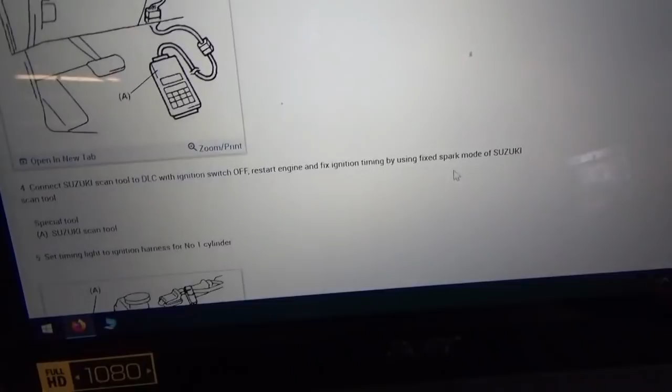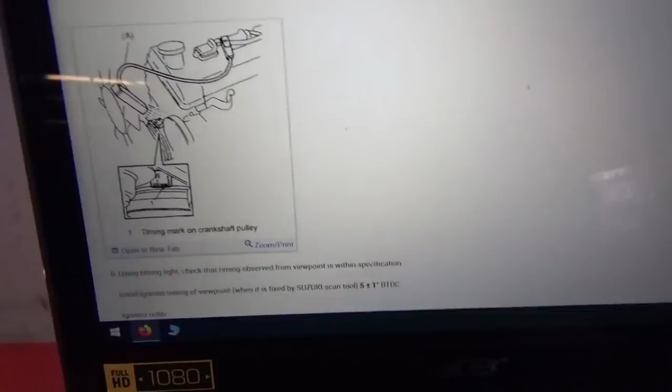So if we look up the procedure, this is an OEM procedure. Warm up the engine, hook up the scanner, and switch it to fixed spark mode. That will set the timing to 5 degrees before top dead center. Then using a timing light connected to the primary wires on the ignition coil number 1, you point it at the harmonic balancer, and we should see that little mark at 5 degrees before top dead center.

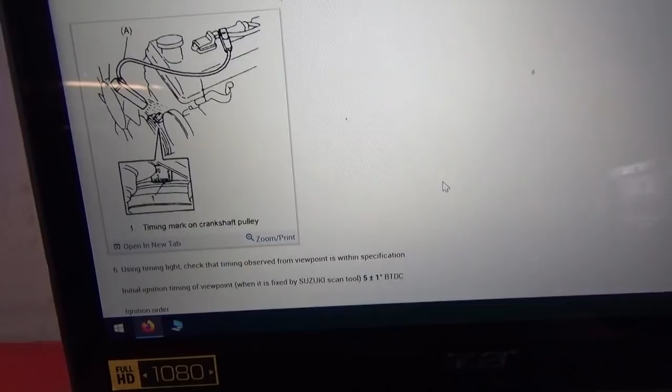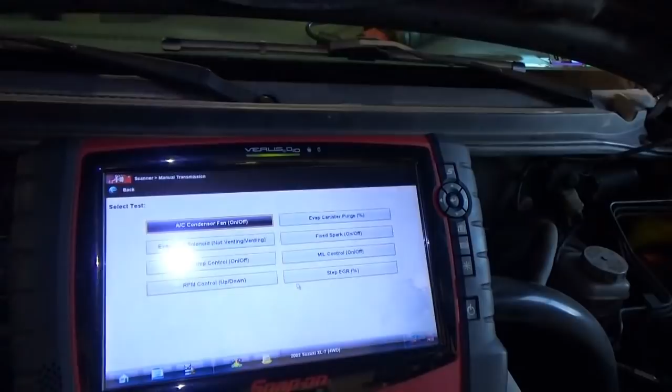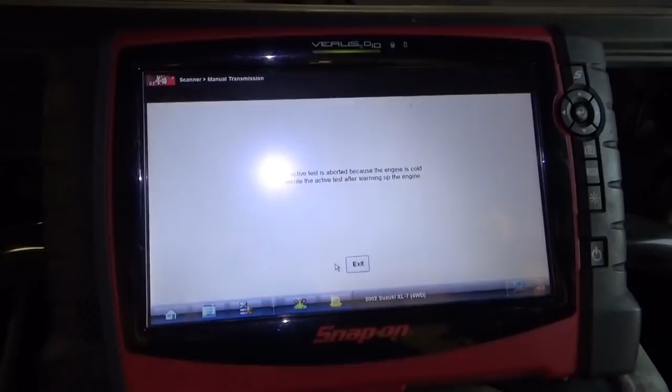So let's do that check and go from there. Alright, start it up. And on our scanner, from the actuator tests, we go to fixed spark. So warm up the engine, engine's idling. Okay, it cooled down a little bit, so it'll warm back up.

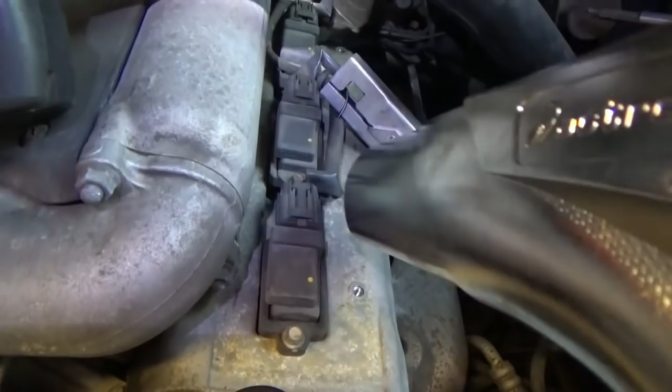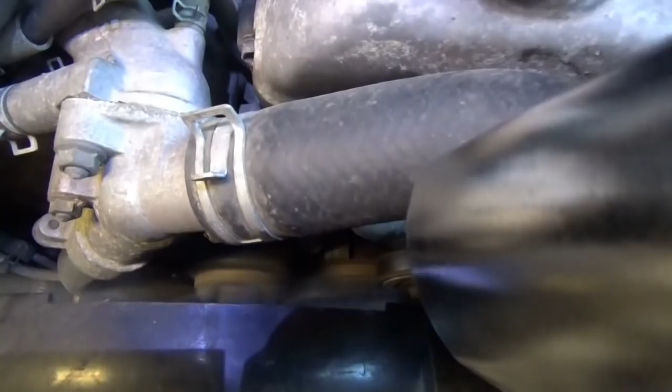The cool thing is, the timing light is connected to the primary wires, the 3-wire coil - feed, ground, and the low voltage trigger signal. The timing light works off of the current through the primary winding, so you don't need a secondary ignition lead to have your timing light work, which is pretty cool. So we can aim it down there, and you can see the white mark, hopefully. It's to the left of the marks on the timing cover.

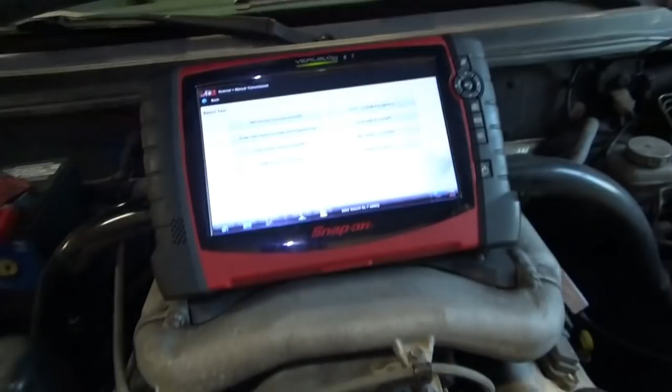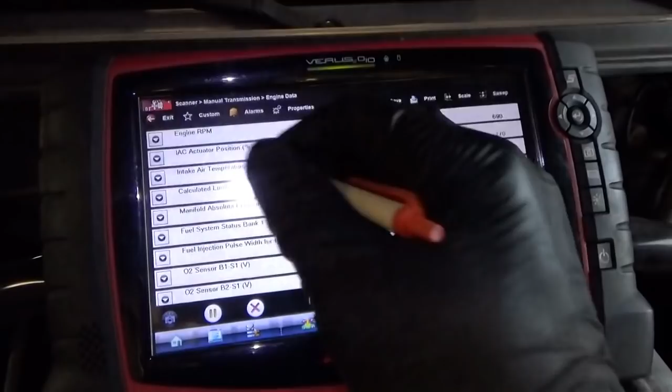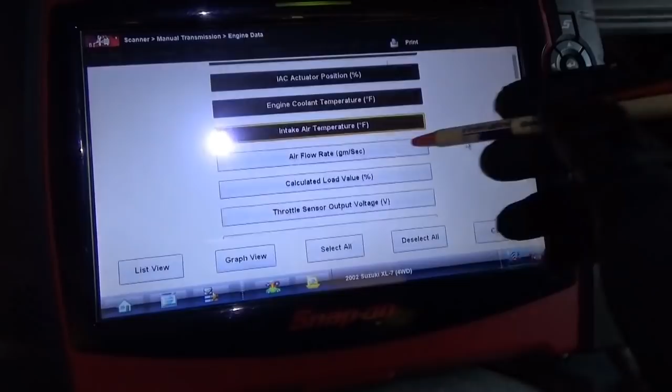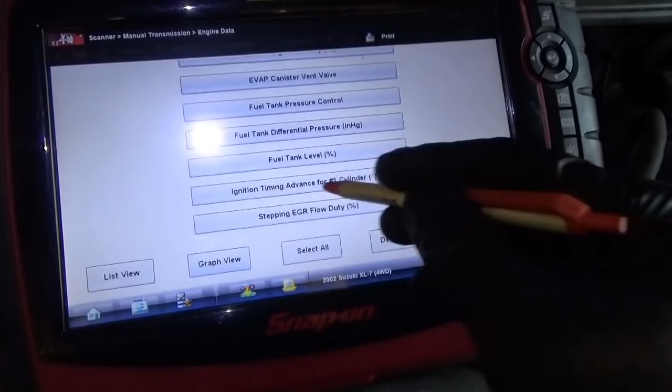So once this engine's warmed up, let's just do data display. And the fuel trims, I notice, are a little high - about 10% long term at idle. So if we go to custom data: RPM, desired RPM, IAC, engine coolant temp, and let's do long term on bank 1 and 2, and ignition timing advance for cylinder number 1.

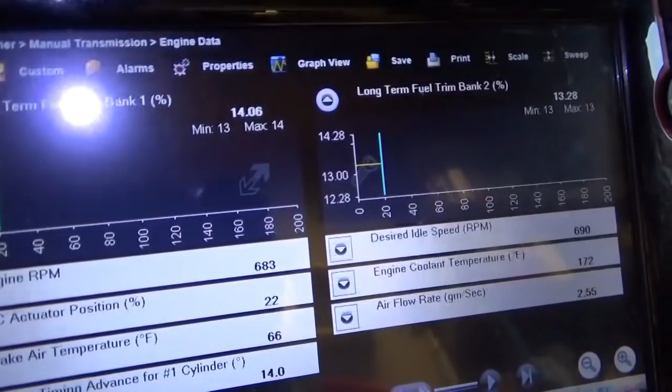So if you look at our fuel trims, right now they're at 13%, which is not good. It's supposed to be around 0. The mass airflow is about 2.5 grams per second. It's a 2.7 liter engine, so that's pretty close. Let's rev it up a little bit.

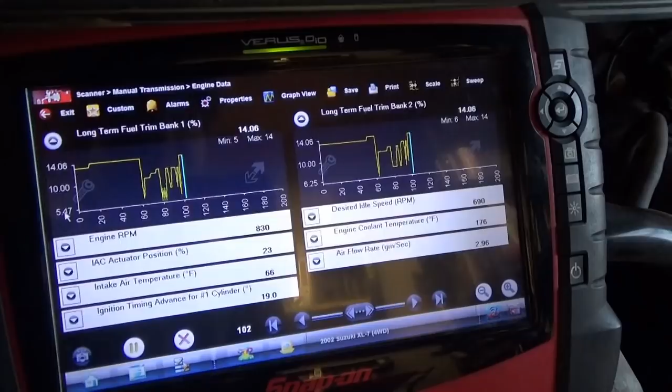See, the fuel trims are definitely kind of high. So another variable here is that we either want to confirm or not confirm is the timing chain. The timing chain tensioner is getting a little rattly again. If you remember, we replaced it at 130,000 miles, and it's been fine since then. Now at 170,000 miles, it's starting to rattle a little bit when the engine's hot, at a hot idle. So is it possible that this cam chain is stretched, causing everything to be retarded, and basically the engine's not breathing right, and you get fuel trim problems, power issues.

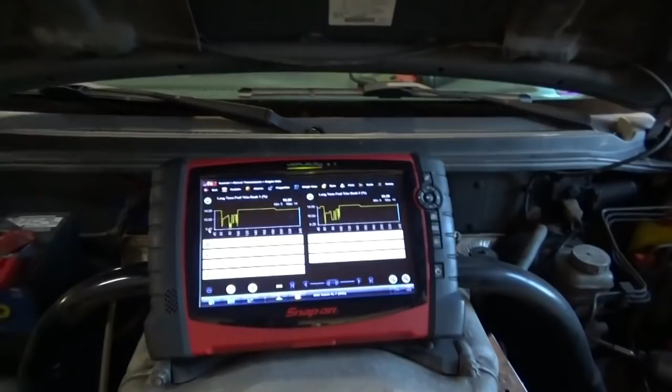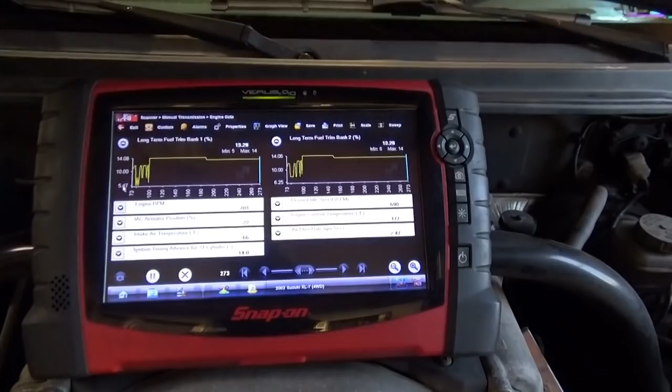The mass airflow is only 2.5 grams per second right now, maybe that's a little low. So let's jump back into that test - actuator test, fixed spark control. Again, custom list: RPM, airflow, long-term, and let's graph ignition time.

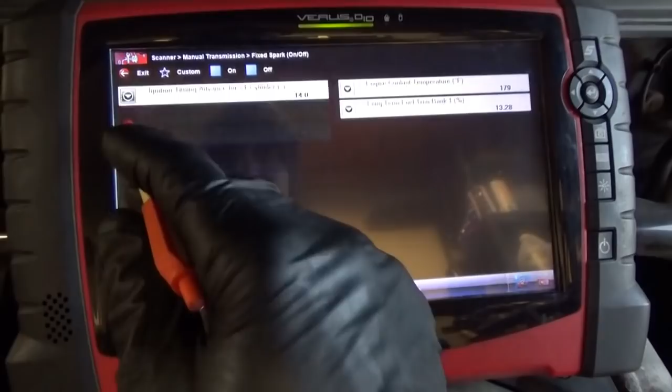So when I hit on, this thing goes to 5 degrees fixed timing, and if you look at our harmonic balancer, that white mark is still way to the left of the timing cover marks. It's at about 20 degrees before top dead center. It's fixed, but it's not at 5 - it's like 15 degrees out of spec.

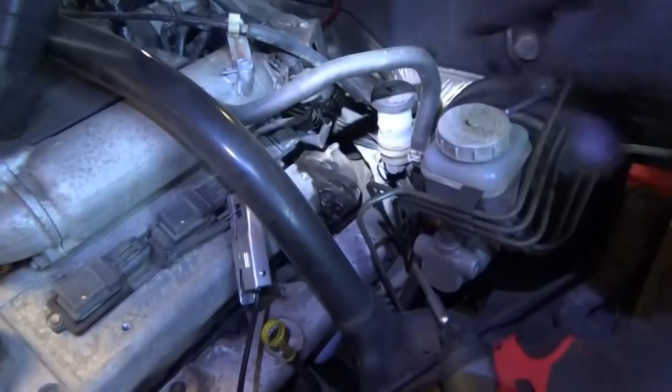Now, a few years ago, I actually advanced the camshaft position sensor just to get more power, and it worked, but something's still not right. So first thing I want to do is confirm that white mark is indeed TDC of number 1, so we're not chasing ghosts. Then we can use a pressure transducer in cylinder number 1 and do 2 channels, the spark and TDC number 1, and see how many degrees on the Pico that's occurring, to verify what we're seeing here. Then we can tweak the spark timing, see if it does anything, and make heads or tails out of this. Also on the pressure transducer waveform, we should be able to see if the valve timing is getting retarded, and by how many degrees.

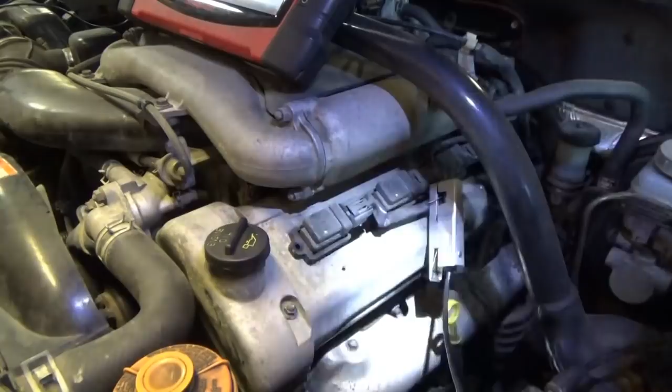We'll go from there. First, let's pop out this number 1 ignition coil and the spark plug.

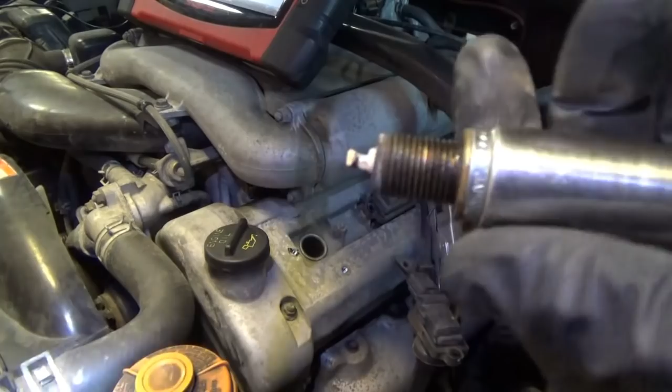Now the spark plugs here I have not touched since I bought this vehicle. It had 80,000 miles on it, now it has 170. These NGK iridiums show no wear, so I haven't replaced them, which is amazing. These might still be the original plugs.

So now that we have the spark plug out, I'm going to put a wrench on the harmonic balancer, turn it, and put a rod in the cylinder to make sure we're at TDC when that white mark aligns with the timing cover. I have a little piece of brake line placed in the spark plug hole, touching the actual piston. As I turn the harmonic balancer here, we'll see where TDC is. You can see it's rising out. Still coming up.

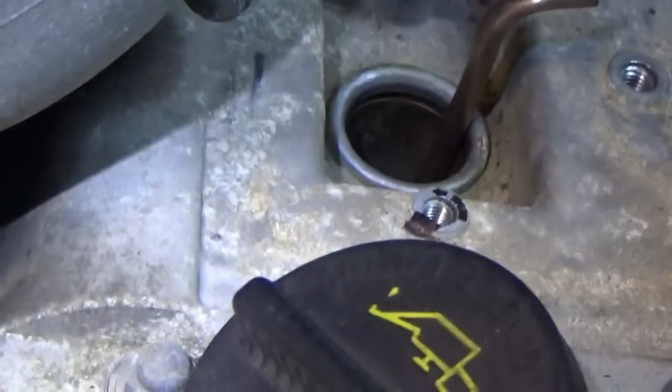Right about there. And indeed, the little white mark is exactly at 0 degrees right now. So right there is 0. We're definitely at TDC. As soon as I turn the wrench a little bit more, that rod will start to go down.

Okay, so I believe the white mark. So our ignition timing is definitely way over advanced.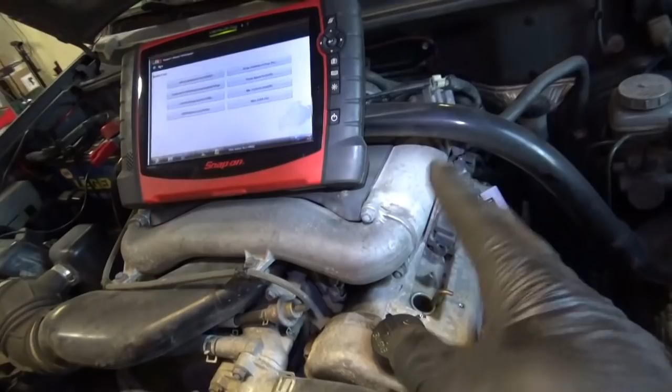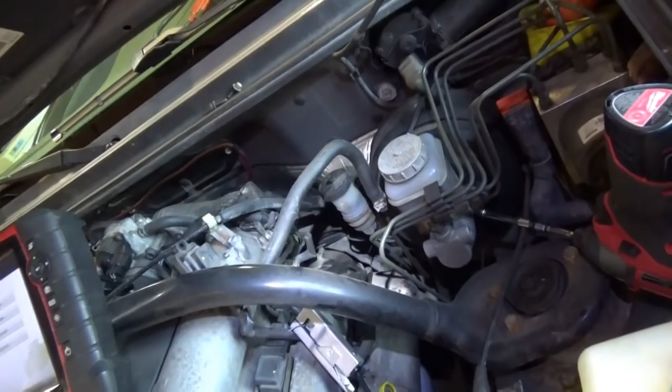Now I want to put an in-cylinder pressure transducer in here and unplug the fuel injector. Do the same test with 2 channels. We'll put a current clamp on here, and then we can tweak the camshaft position sensor and see, if we go by spec, 5 degrees before top dead center, what that does to our power and our fuel trims.

Alright, so here's the setup. 2 channels. Channel 1, the PHAD homemade pressure transducer, and our amp clamp on the 20 amp scale. 1 volt is 10 amps. Obviously we want to re-zero our amp clamp. There we go, it's 0. We're showing 0 psi. These are custom scales, so this goes from 0 to 130 psi.

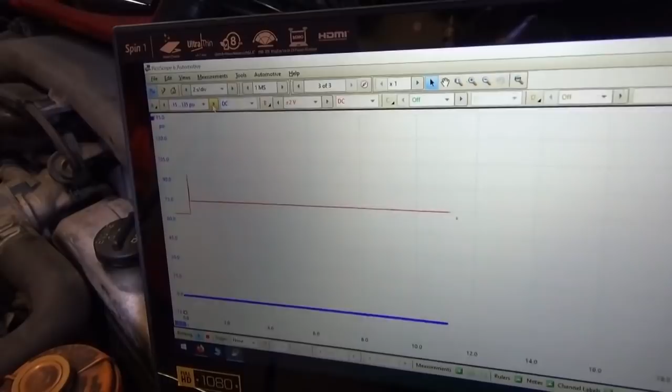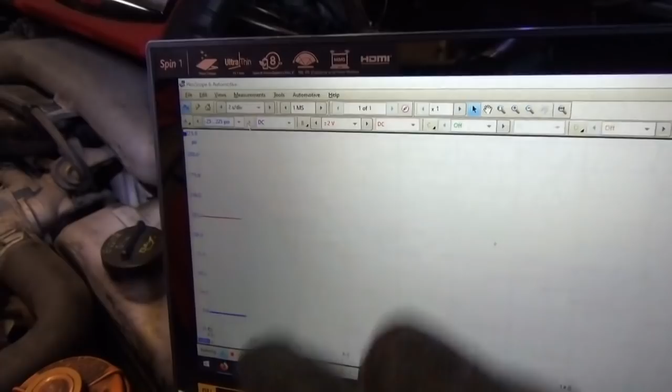We're just running it at idle. I made several custom scales here. You can go all the way down to -20 to 80, -15 to 135, and then -25 to 225. This transducer is a 200 psi unit. So let's try the middle scale.

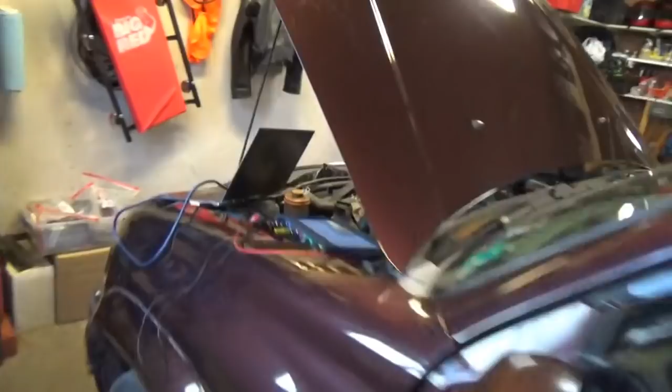Let's fire it up, see what happens. Make sure my laptop is steady. Okay. Obviously a misfire. You got the spark jumping right there.

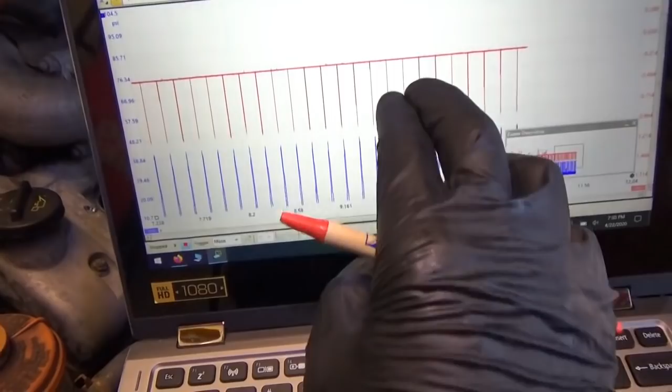Pause it, see what we have on our transducer. So our current is going the other way, so we can just flip the amp clamp around. I guess that's the power wire, not the ground, but it doesn't really matter.

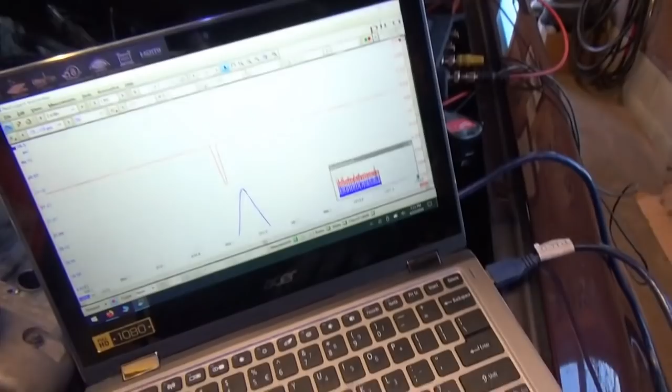Okay, go back to 100. Okay, now we're right side up. And what happened to our pressure transducer? Okay, there's our waveform. You do a snap throttle.

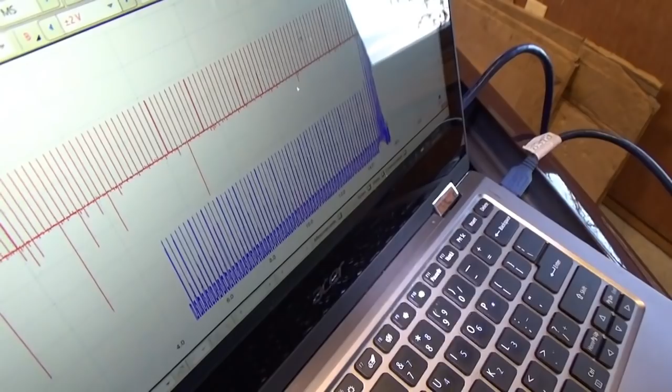Okay. Now, let's do the fixed spark.

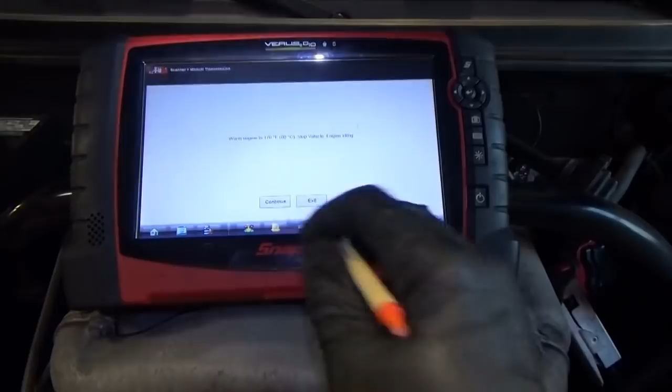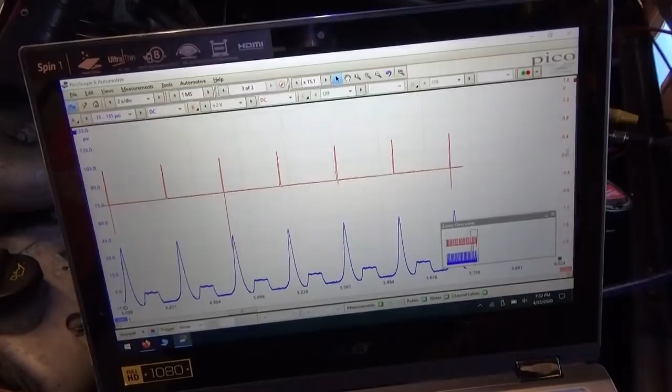Okay, we'll let the engine warm up a little bit more. For now, we can pause and zoom in. You can actually see where the spark is occurring right now.

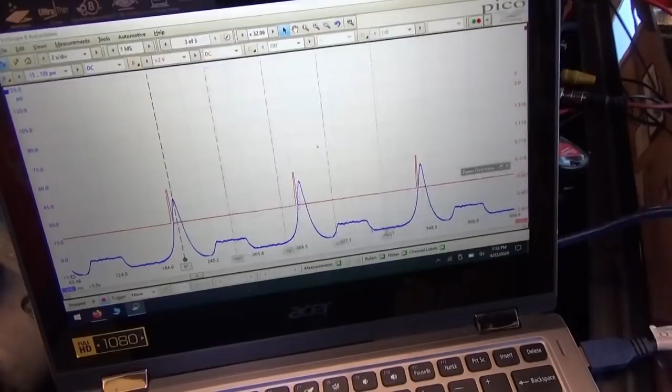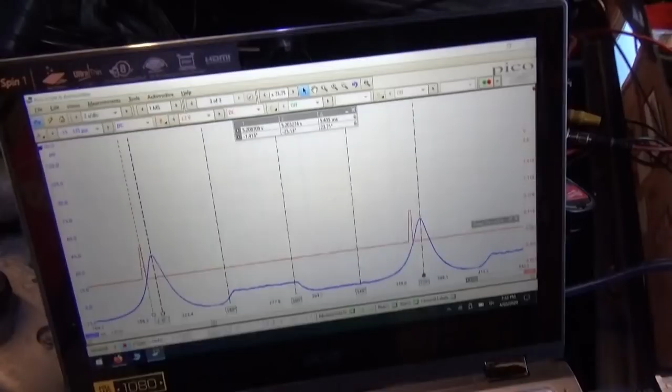Let's put in some cursors. So we go to rulers, 4, okay. So let's say that's 0 degrees. That's 720. Now, from there to there, delta is 23 degrees.

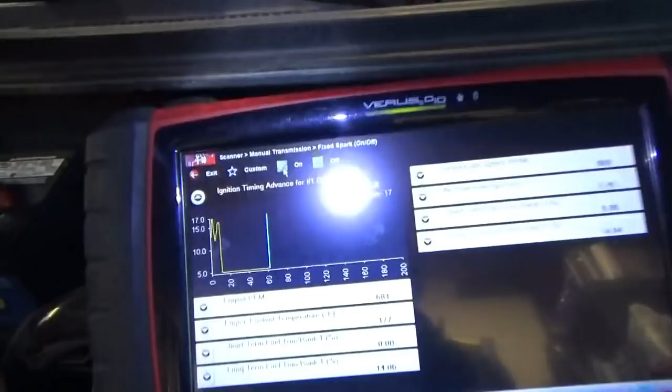Okay. Alright, engine's warmed up. I got it activated for 5 degrees before top dead center. Verify with the timing light. It looks like we're about 20 degrees before top dead center. And on the scope, I'm rolling.

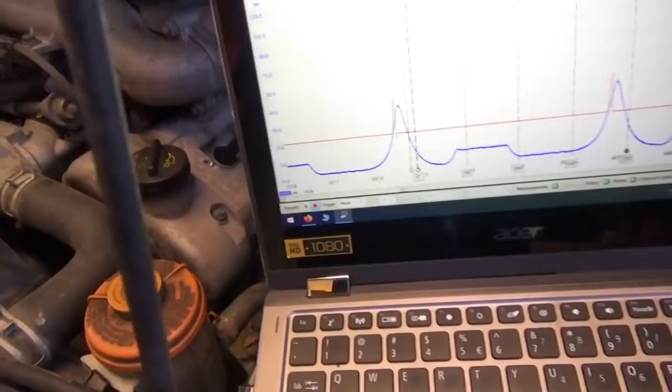So let's pause that. Zoom in. Make sure our cursors are right at TDC. Right. See there.

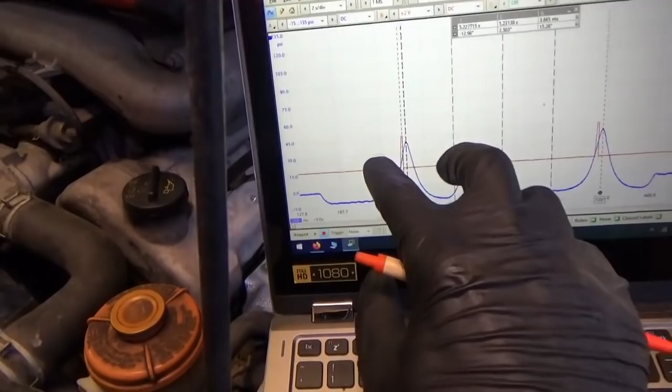So we're shooting about 14 degrees before top dead center. It should be 5. Yeah, I guess that's believable.

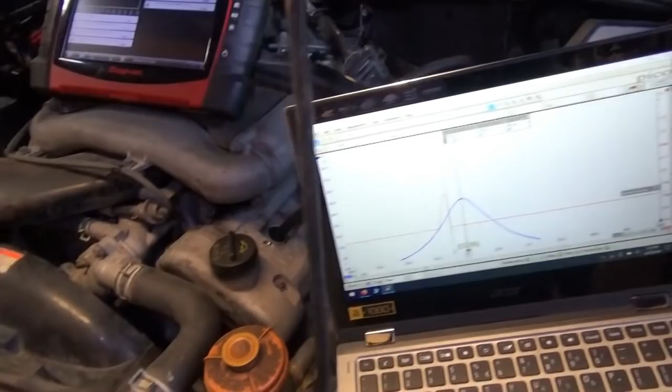So what if we right now move this cam sensor to make that white mark line up and do the check again. Alright, so I loosened up the pinch bolt for the cam sensor and I put a white line right where it is right now.

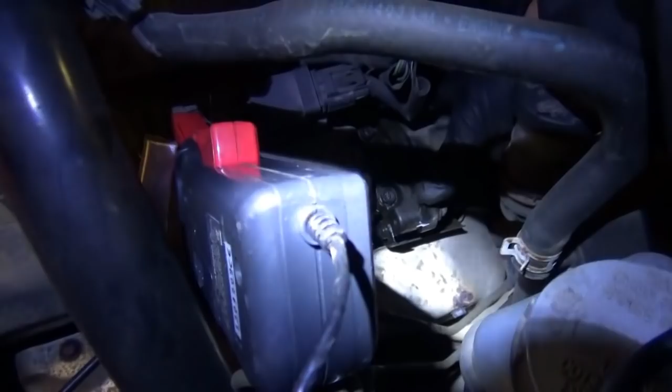Camshaft's turning this way. We want to retard it a little bit to get back into spec, like that way. Let's go back to our timing gun. We're still at 5 degrees.

So our mark is at about 15 degrees right now. We gotta keep going. So we're at about 10 degrees right now. Man.

One, two, three, four, five. Okay, right there. That's spec. So tighten the bolt down.

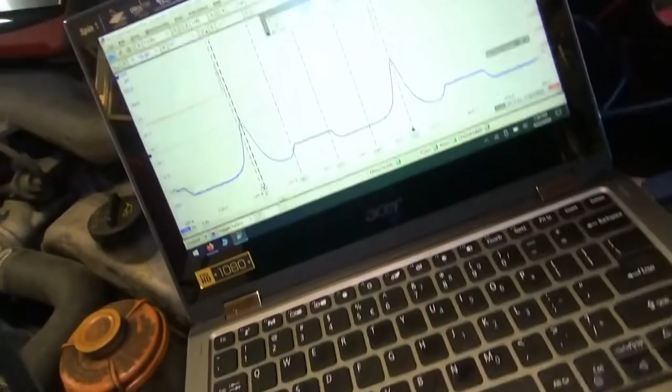You can see how far advanced I had it. And now, we run the scope. Pause it. Zoom in.

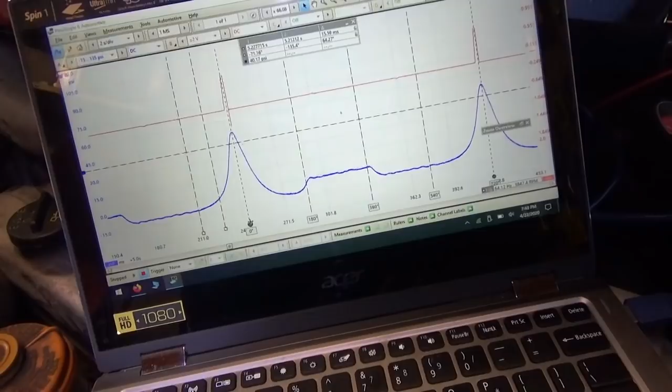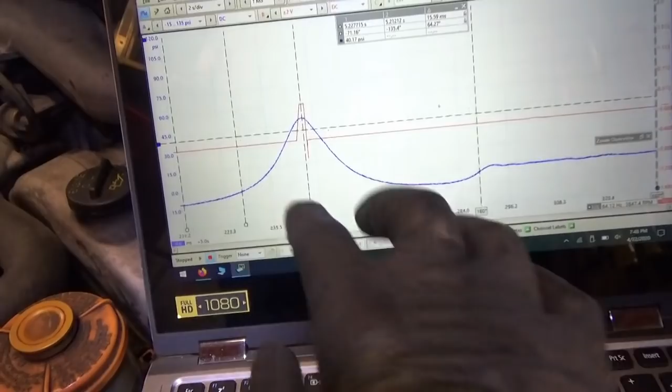You can actually see by the scope our ignition is actually occurring after top dead center now. So the timing gun might not be the most accurate way to do this. Let's set a trigger.

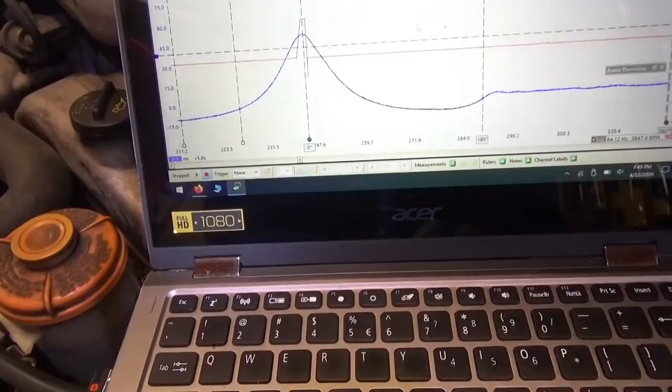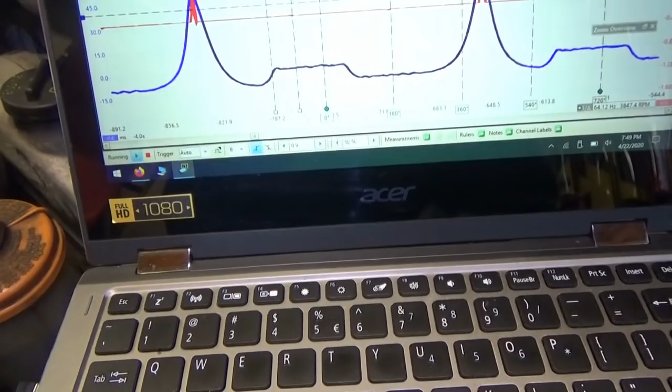A channel B. Where's our trigger? To 100%. And then knock down our seconds per division here.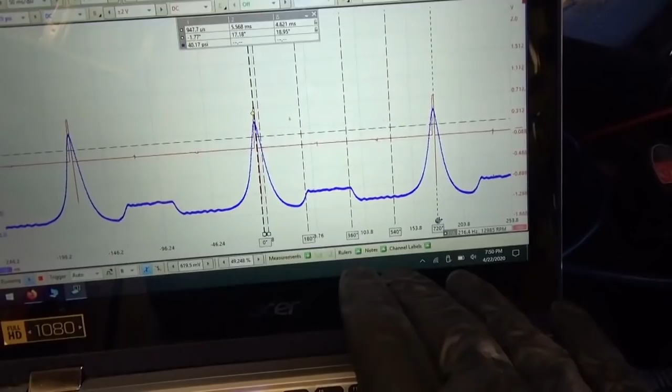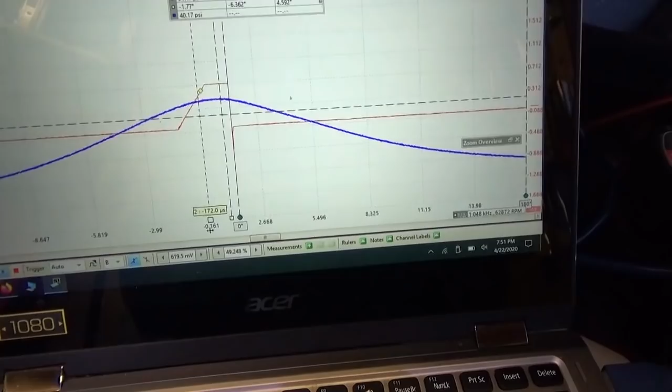Now, to zoom in, we want to be 5 degrees. We want the ignition to occur right there. Okay?

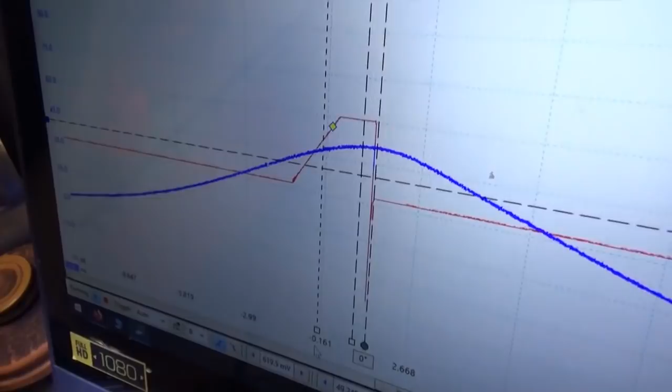Alright, so now I'm going to advance the timing. And look at that red trace. Okay, so the trigger we should have set to the falling edge. There we go. And now we're almost there. A little bit more.

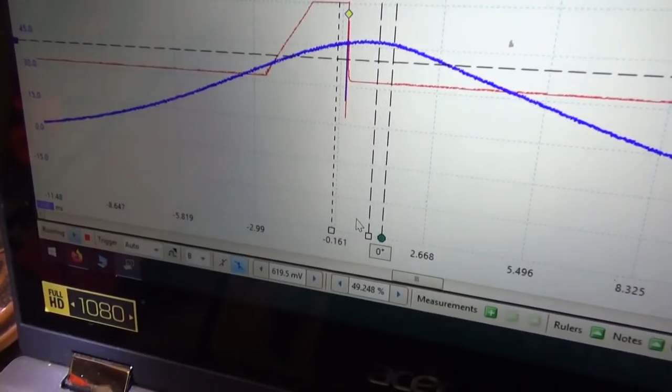About 5 degrees. And what does our timing gun show? About 12 degrees. So what's the discrepancy from? Is this not really TDC according to the pressure transducer?

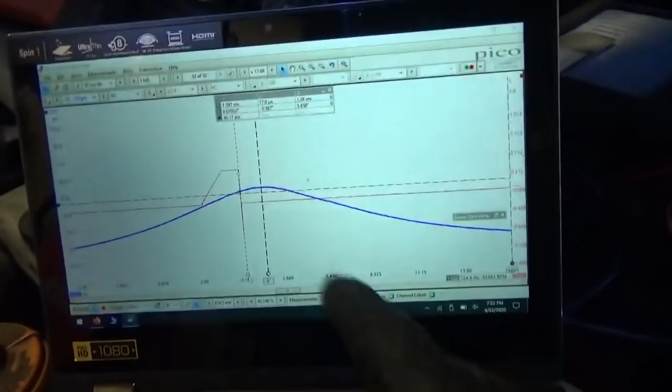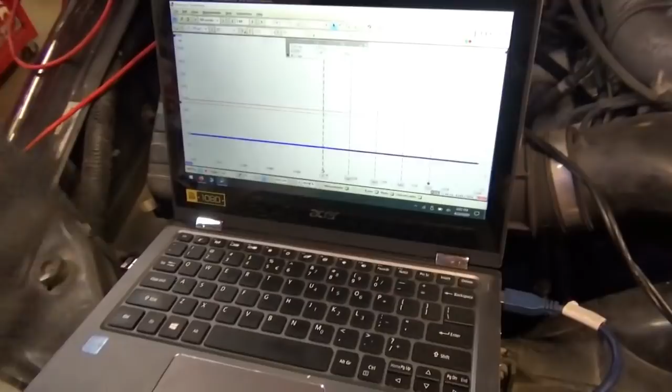Okay, so now we have the same experiment set up on cylinder number 2. And we could do the same fixed spark. Now start it up, put it into fixed spark mode, and see if this one is 5 degrees off, or if the timing chain is stretched and the ignition timing is off of this bank, and if the actual mechanical valve timing is off, well, what do we expect? TDC should still line up, but maybe the peak pressure will be a little different, but let's give it a try.

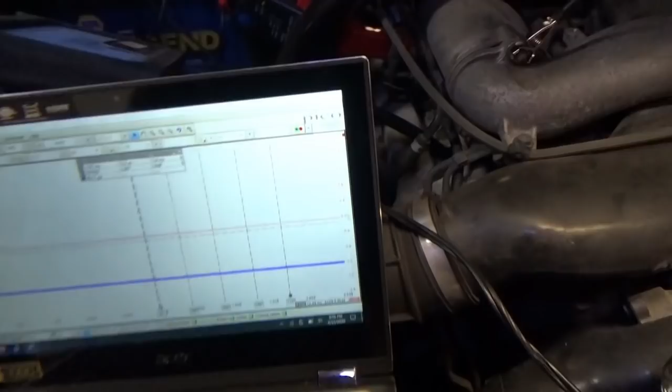Alright, I got it in fixed spark mode. We're at 5 degrees before top dead center. So let's look at cylinder number 2.

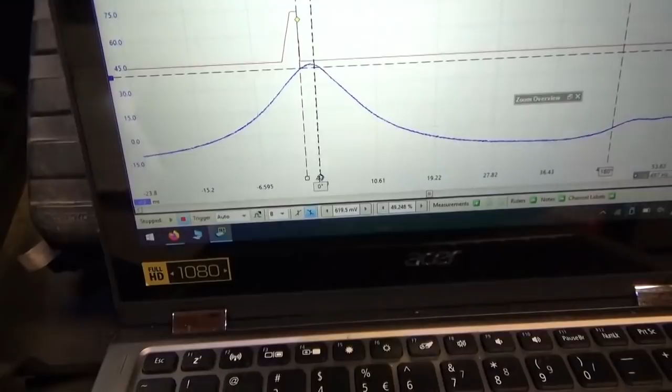Set up our rulers here. Right around there. That's showing 8 degrees before top dead center. Well, actually, okay, 6 degrees. So not much difference.

5 degrees before top dead center. So between bank to bank, it seems consistent.

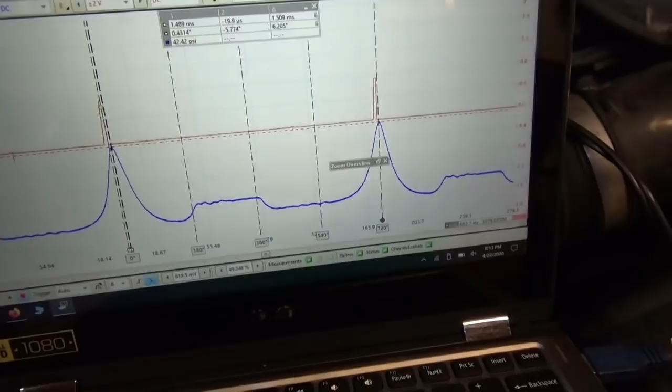Now that's good. What about the waveform as a whole? Again, very similar. Our peak pressure is about 42 psi. And valve timing, again, looks very similar.

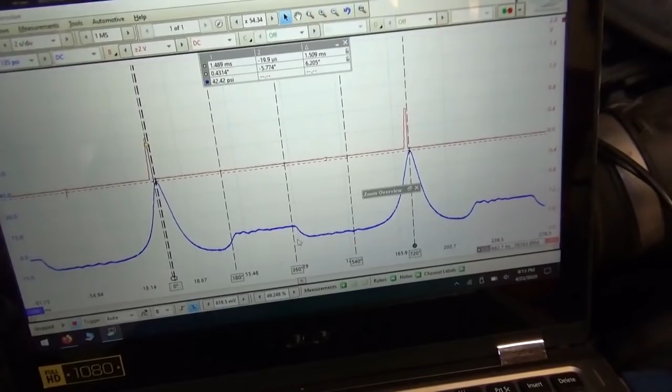Is this a no good? Hard to say. But at least we have the data. We'll take it for a spin with this ignition timing, calculate the miles per gallon, and see where it goes.

But hey, your own vehicles need some attention too. This truck has treated me really well. It's gotten me through a lot of things. Reliable, and I want to keep it that way.